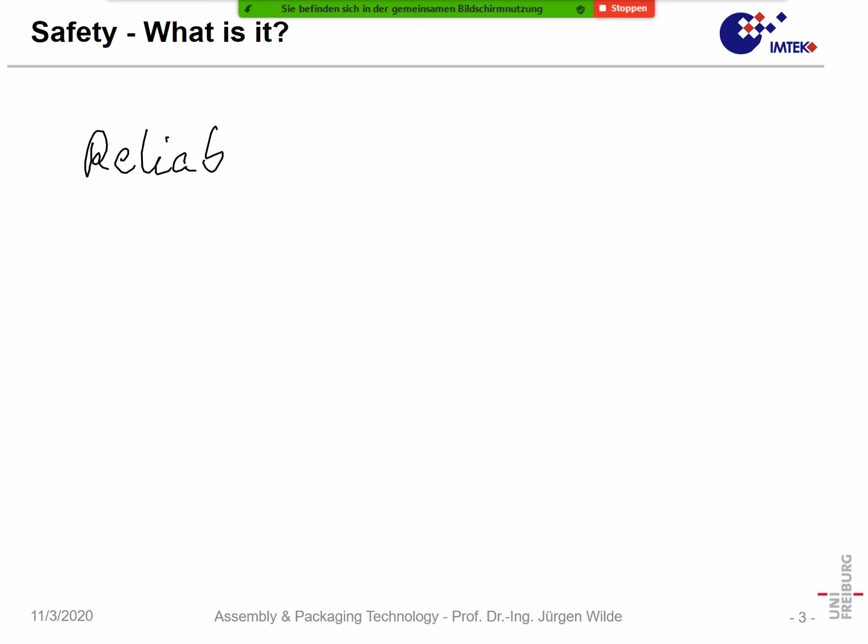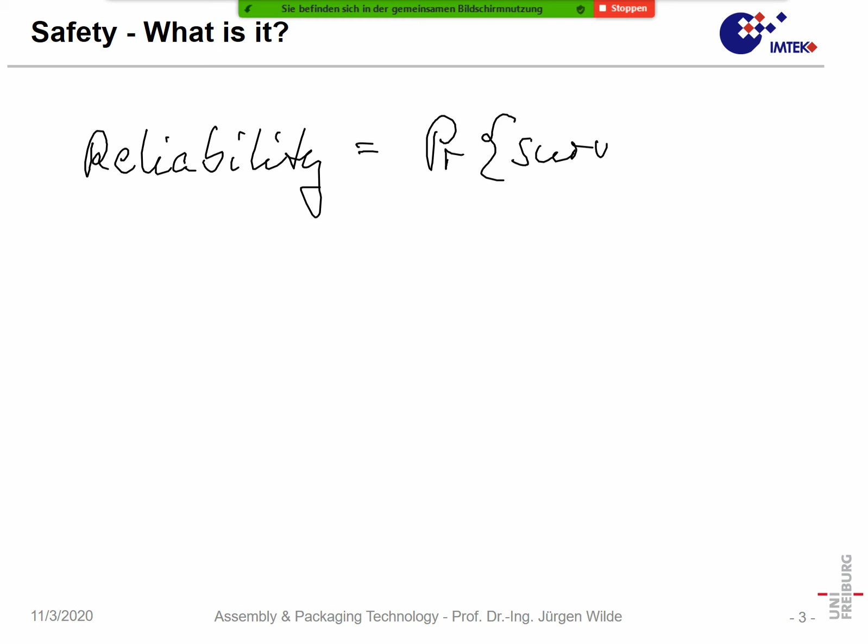So it's a probability of survival, or the probability that it is functional after a certain time. Okay, so reliability, that's you could say the probability of survival, and it goes from 100% to 0%. I don't know why it is not writing here. So it's a probability of survival, 100% to 0%, and it only holds for non-repairable systems.

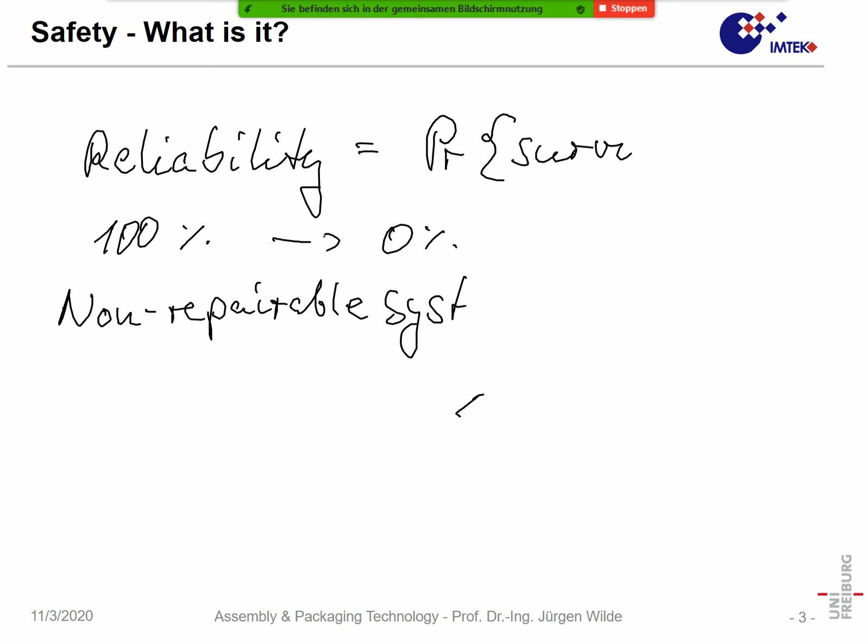So normal technical systems are repairable. For instance, we have a car or an aircraft, or a whole system like the tramway system in Freiburg. All of these are repairable, but non-repairable is, for instance, a single electronic device or a single component. In most cases nowadays, it will not be repaired, and in that way reliability is limited to these.

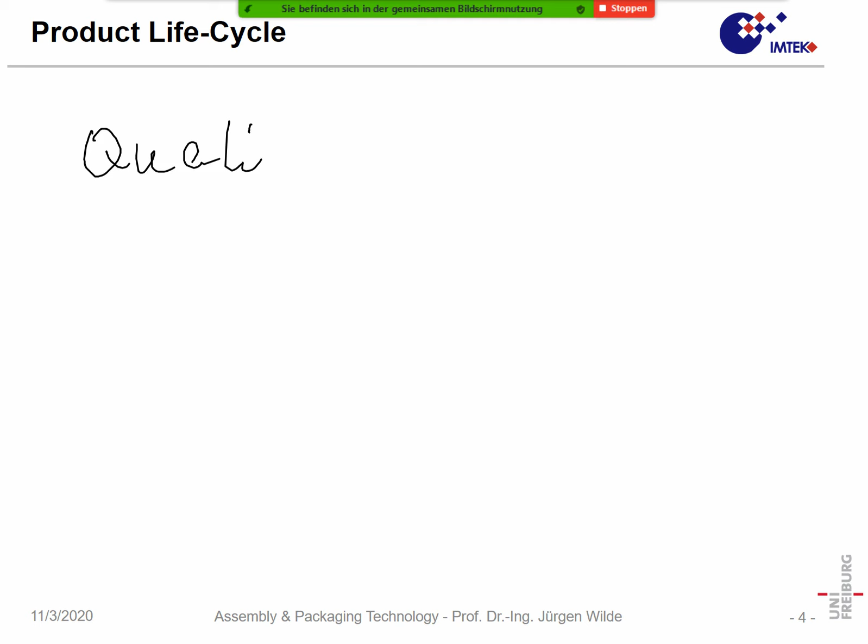Okay. Reliability also is an aspect of quality, we can say that. You could say quality refers to 0 hours, so that means how good is a product? Is it fit for use when you just produce it? And reliability in some way means quality over time.

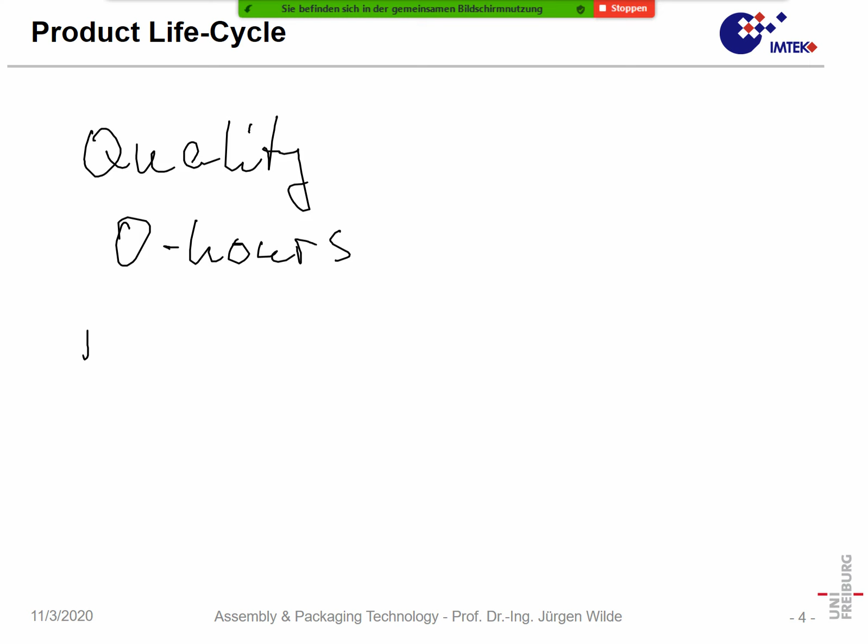Okay, here it limits, and that means the aspect of time is very important in reliability.

So there are typically definitions in standards which have been published, and important standards are the IEC, that's for electrotechnical applications, and ISO is, let's say, for the rest of the world: mechanical engineering, car industry, and so on. So IEC means International Electrotechnical Commission, while on the other hand ISO means International Standards Organization. And the IEC and the ISO are the most top-level standard organizations worldwide. So you could say in some way standards are the more important, the higher their global level is.

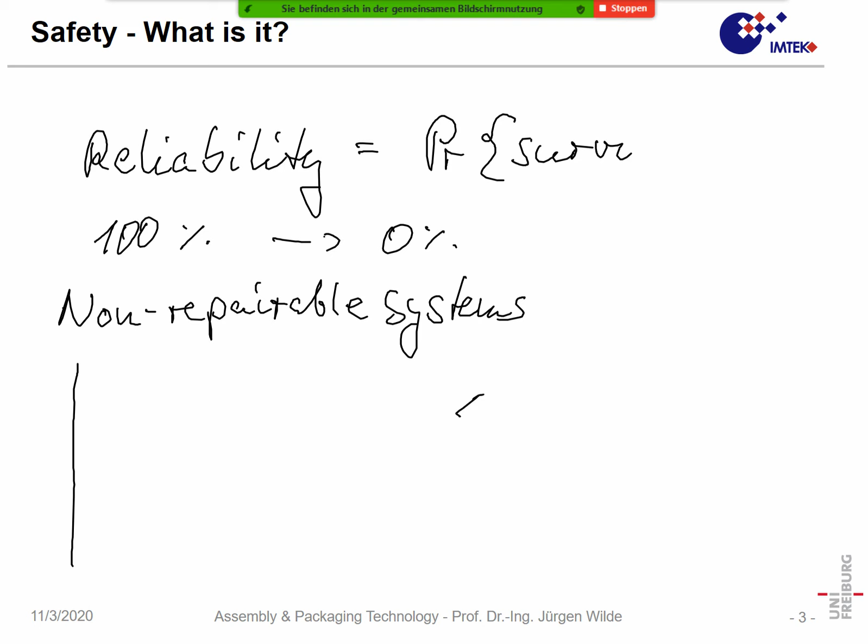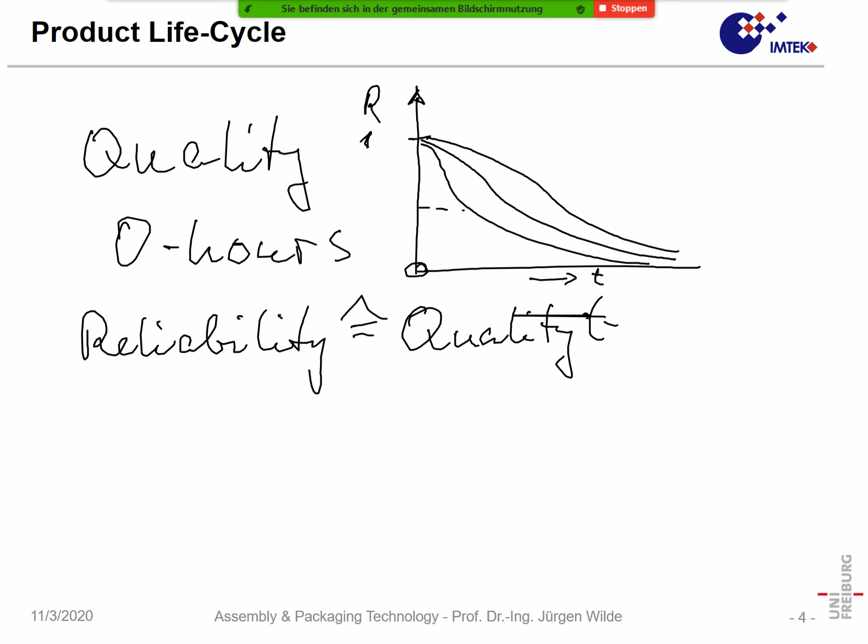Why would there be several curves of reliability over time? Let's say time can be in hours or in 1,000 hours or so. Why could there be a different behavior of reliability over time? So that means you start with 100 and then you get less and less. After some time, you only get 0.5, for instance, or some other time you only have 0.1 or 10%, 50%.

Can you give me an idea why reliability would go down differently? Yes. Can you give me feedback?

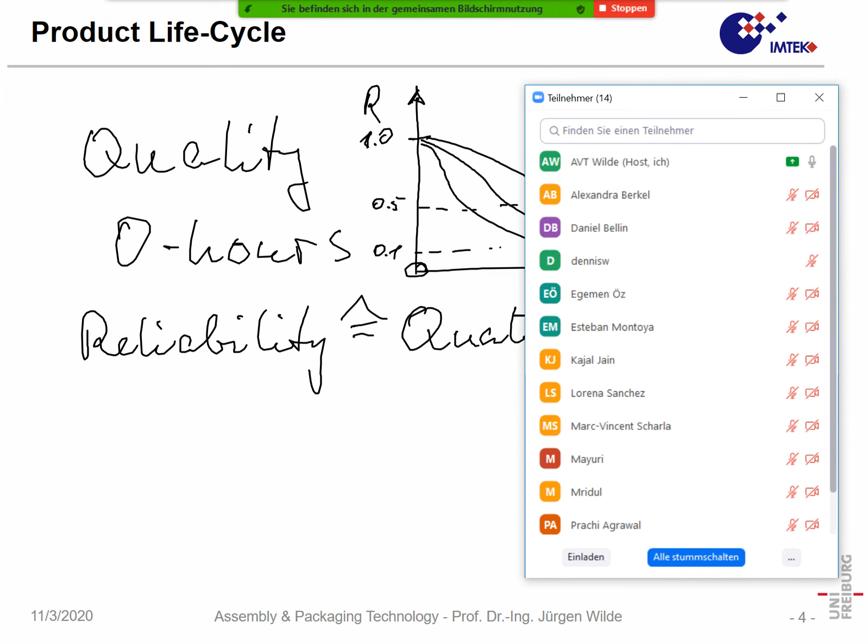Maybe because of different quality levels. Yeah, that is correct. The quality level can be different.

So here we can say reason. I abbreviated quality level.

Now imagine cars. Imagine a car driving in Central Europe, like in Freiburg, under normal conditions, with the driver having a moderate driving style. On the other hand, you have someone in, let's say, some backyard of Asia in the desert, and the driver is driving like hell. What is different here in these two conditions?

So it's the environmental and the loading condition. It can be the load. If you drive faster, if the road is worse, or you don't even have a road but only a track, then there is a much higher load on the suspension of the car, a higher load on the engine, and so on. And of course, a device that is loaded in a more harsh way will degrade earlier.

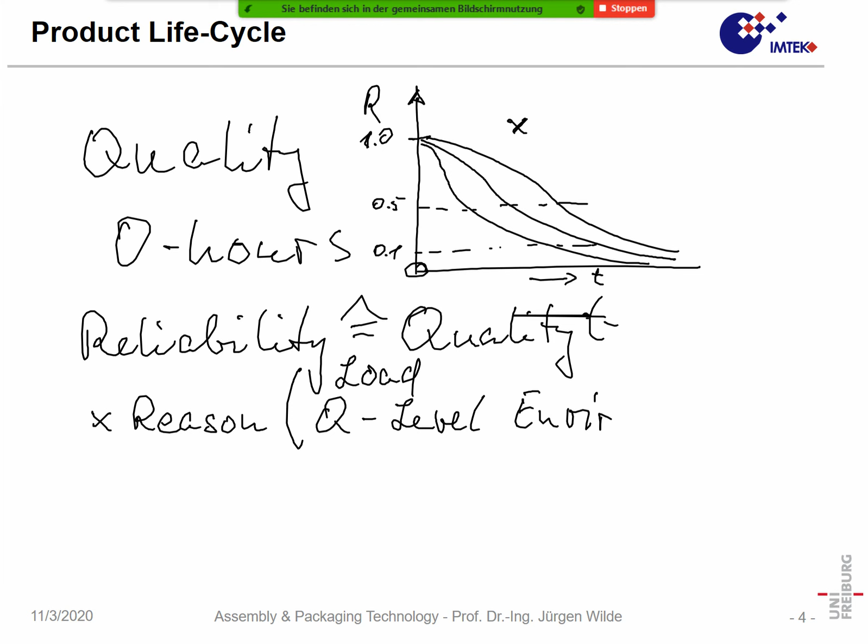So then we have the question of safety, and safety is also important. It's not just the question of whether something failed or not, but safety is a status when the risk of damage is limited to an acceptable value. It is the risk of damage to persons or property — the risk will not exceed a maximum acceptable risk.

Now the question is, what is risk? Risk is something, I would say, on the bad side. What is on the good side is you have a good chance, yeah, of winning, for instance.

A risk is defined by the probability of some event happening — here the probability is used with an H. Unfortunately we have for risk also an R, like for reliability, but that's not the reliability R; it's the probability of an event which leads to a damage, and S is the amount of damage caused by the event.

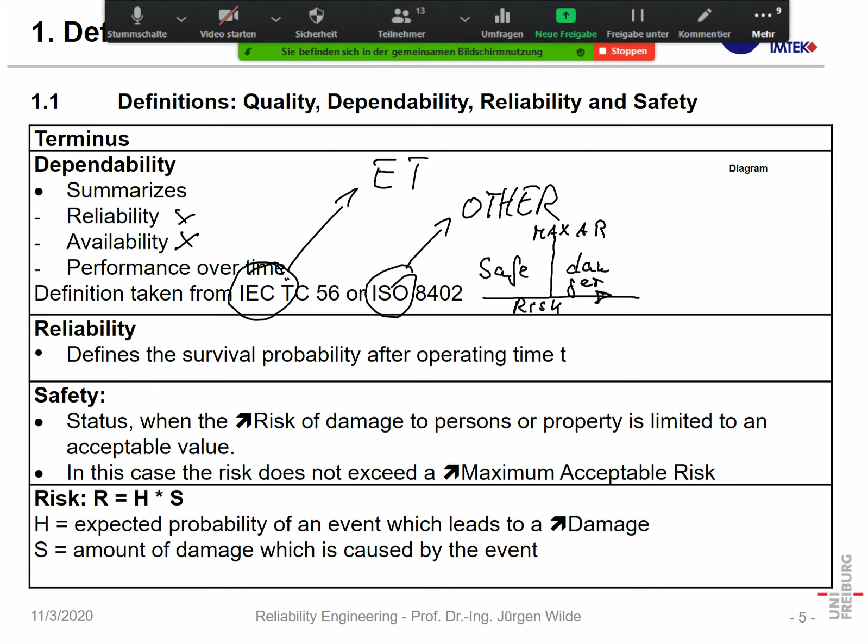Or is there a more intelligent statement about safety or non-safety of nuclear power stations?

We must say it again depends on the maximum acceptable risk. But on the other hand, you cannot just define the maximum acceptable risk in an arbitrary way. You cannot just say that's a number you have to deal with, but such maximum acceptable risk must be defined and found in a proper way.

And there are several aspects. For instance, one is ethics, so that you avoid damage to people or death of people. On the other hand, you could say, what would be a maximum acceptable risk for a new technology?

Then you could say, if I have a similar technology, for instance, a new vehicle type with autonomous driving. And now you would say, when you go for autonomous driving, if the maximum acceptable risk is not higher than the typical risk in normal piloted driving, then you could say that's possibly an acceptable value.

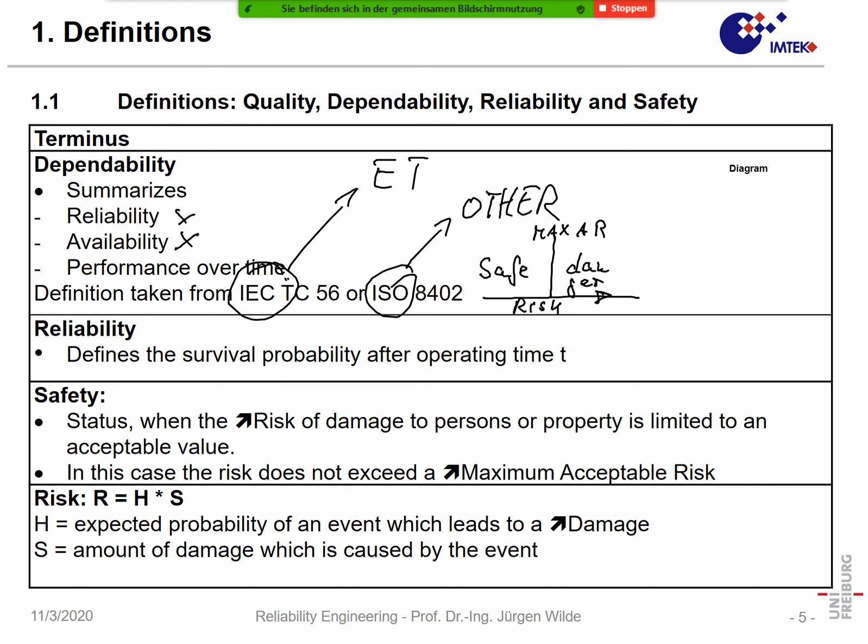Danger: when the risk is higher than the maximum acceptable risk, we are in danger. So then we have other words which are important: we have a fault, a defect, and a non-conformity.

All three are non-fulfillment of at least one of the requirements to a unit. Typically, a fault is used for logic states. For instance, you have some faulty bit in your computer. The calculation fails, but when you reset your computer or restart your program, all is fine. You have no permanent damage.

In case you have a permanent damage, in most cases to hardware or to material goods, it's a defect. And the failure is the transition from a non-defective to a defective state. When you go from a defective to a non-defective state, it is a so-called repair.

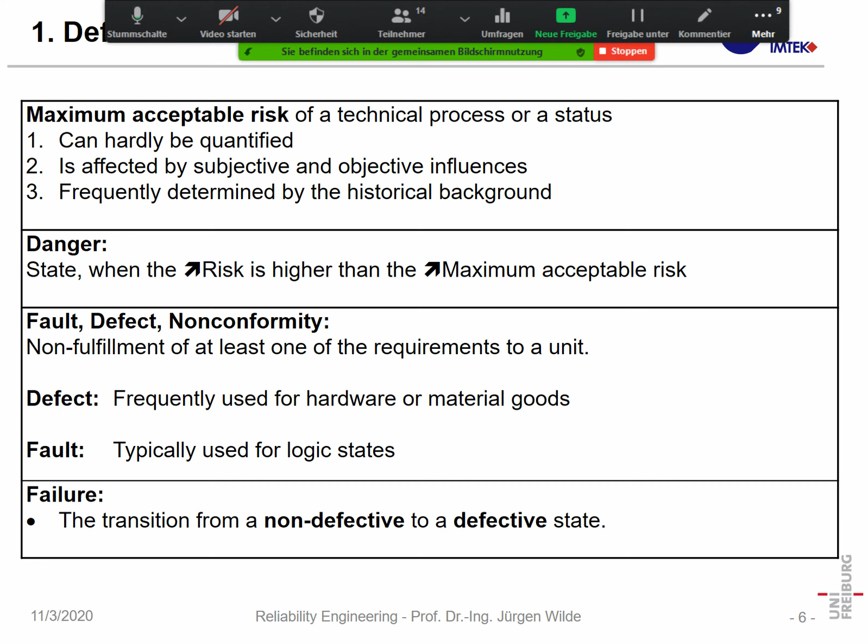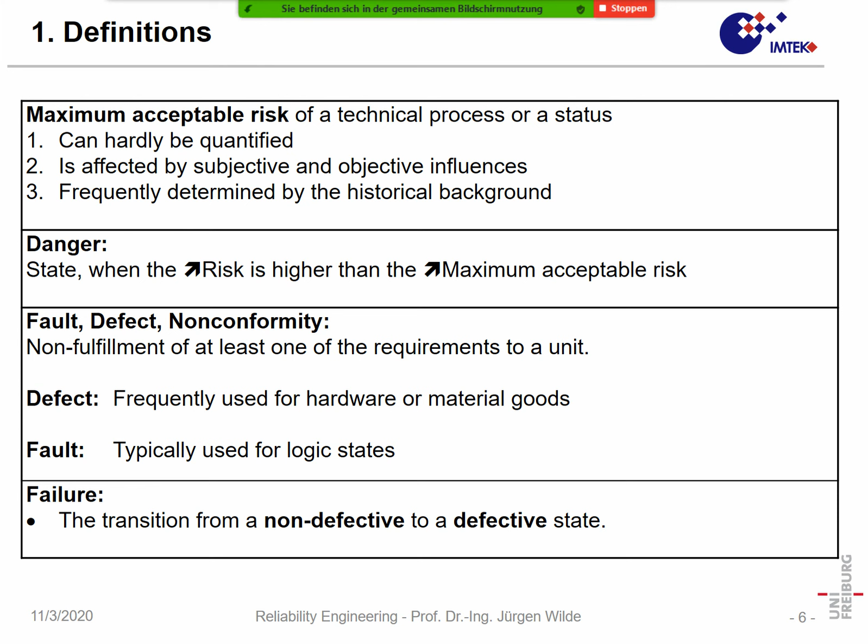So non-conformity is the general non-fulfillment of requirements. Defect is mostly used for hardware, and defect is mostly non-repairable and permanent, while fault is more a logic state or a state of operation that is not okay, but which can be reset, for instance, by software operations or switching operations or something like that.

Okay, so we had some definitions, and now let's again repeat with the diagram. Unfortunately, that system doesn't work as I would like it to. Let's say here we have, now we make 100%, we can also make 1, and reliability goes down over time. That is R.

On the other hand, we have the probability of failure, and that probability of failure is the so-called failure function. Both are complementary values, and you could say F is 1 minus R. So the failure probability is 1 minus the reliability probability, and that is a very important and basic function.

Okay. Do you have an idea? What is the probability of the mean time to failure?

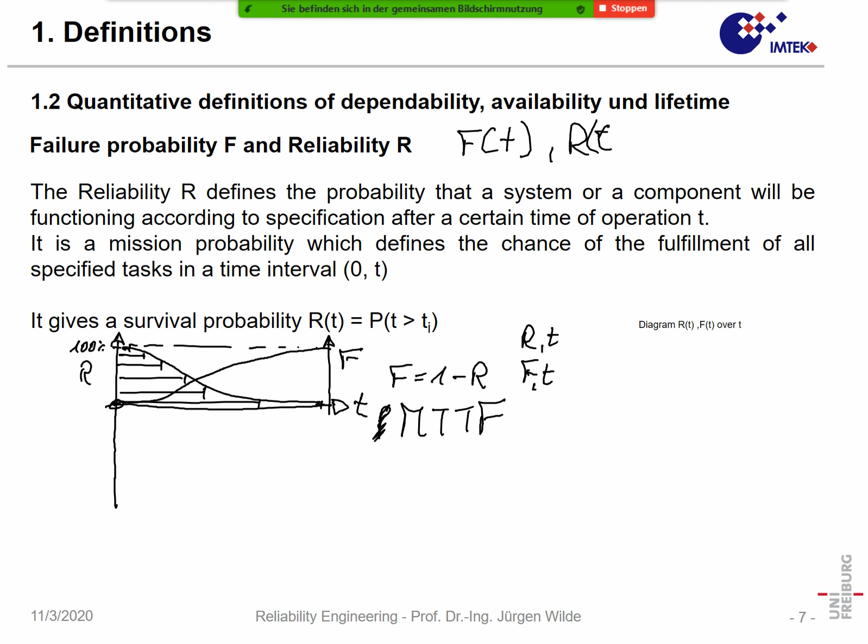That depends on the distribution function. And the distribution function can be, for instance, Gauss distribution. In that case, the probability of failure would be 50%. But in many cases, it is just 63% when the so-called Weibull distribution holds.

Okay, let's go ahead.

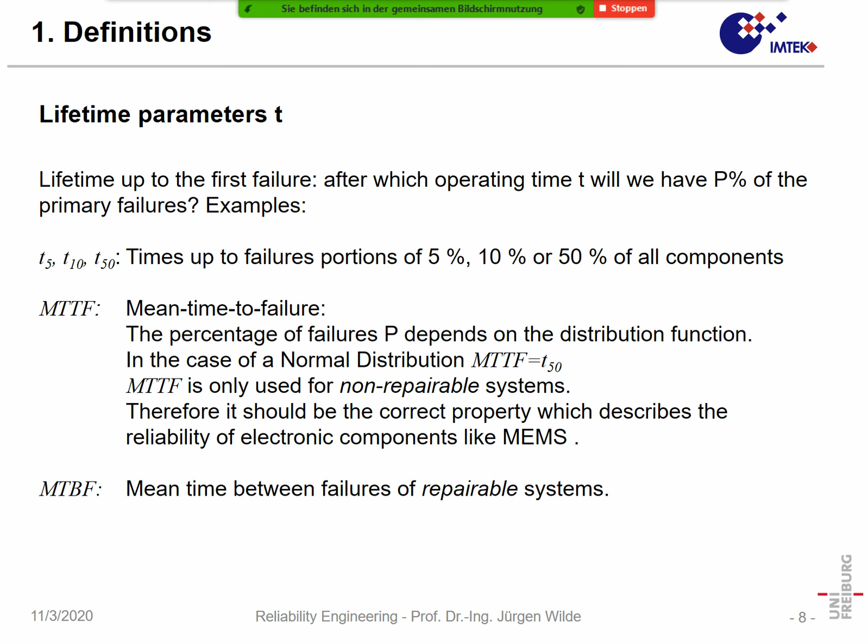So we have lifetime parameters. We could say we have times when 5% failed, T10, 10% failed, or 50% fails. And the mean time to failure is the average of all lifetimes we have in a system. In the case of a normal distribution, the MTTF is just T50. Again, MTTF is used for non-repairable systems.

When we look at, for instance, MEMS or other electronic devices, MTTF should be the proper term we use here. In case we have a repairable system, we use the so-called MTBF, the mean time between failures of repairable systems. But we will see that later on.

Now another aspect we already touched on is availability. What is availability? It's an important factor, for instance, when you buy a more complex system. Imagine you buy a truck, or an aircraft, or a tramway. Reliability could be one aspect, but you are not just interested in when the first failure will be, but more interested in, when you operate such a system over, say, 10 years, how many hours could you use that system.

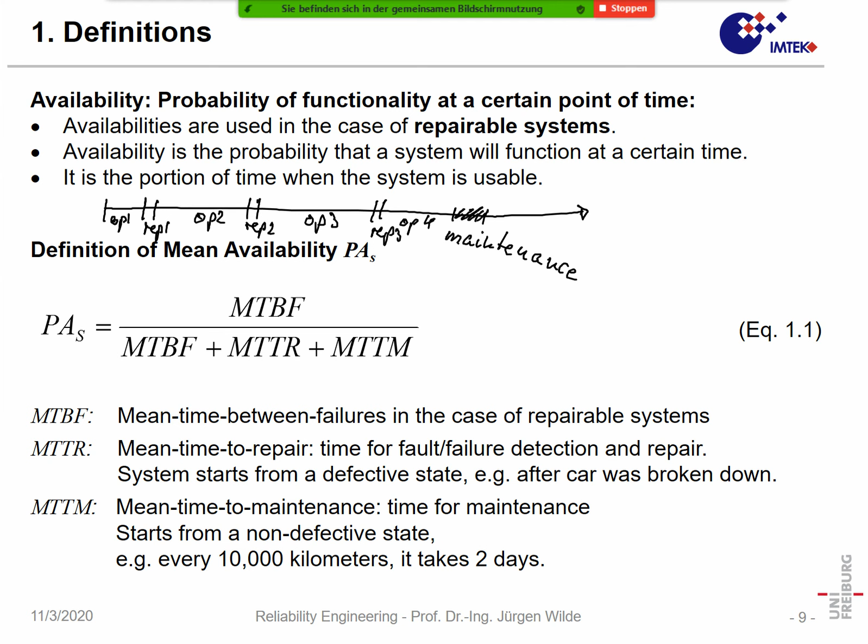Nowadays, when operators of complex systems, especially traffic systems, operate these, they make a contract with the supplier, and the supplier has to guarantee a certain availability. Of course that's not so easy, because availability again depends on the quality of maintenance and repair which the user has. But in the end, the user wants availability which is as high as possible.

Okay, now how can we define reliability? We have already seen it, and it should always be taken on a statistical basis. Reliability, as I said, it makes no sense to use it for a single device. It always makes sense for a certain set of devices. And that set is defined by the number of devices which come into...

Sorry, I have to get my stick back.

So n is the number of devices which come into life, or which are produced, or which are part of the set tested. After some time, n have failed, and so the reliability is 1 minus n divided by n. The failure function or failure probability is just 1 minus r of t, or you could also say f of t is n divided by n. So, easy example: 1 out of 100 has failed, so we have a failure probability of 1%.

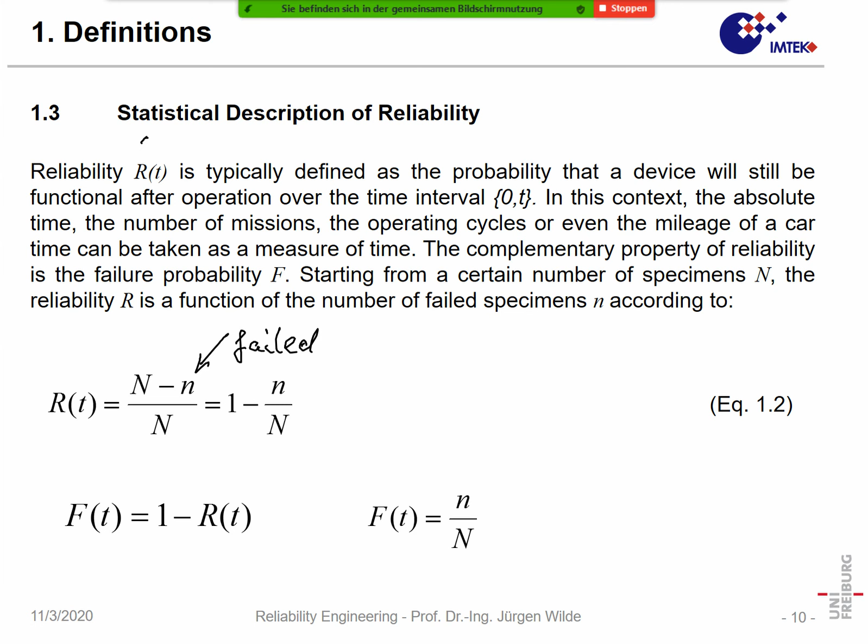As I mentioned, we have the so-called mean time to failure. And the mean time to failure is again defined on the basis of the failure function. We could say the mean time to failure is when, that's r of t and that's t, you take the area under the curve, reliability over time, and you divide it by the height here of that curve. Then you just get the average reliability, the time for the average reliability, and that's mean time to failure.

So in fact, if you write it precisely, it's just r of t dt integrated from 0 to infinity, that's the area under the curve, divided by the height. As reliability can only go from 0 to 1, that delta r is just 1. So in that way we have a very clear definition of mean time to failure, and we also see that mean time to failure mainly depends on how this curve goes.

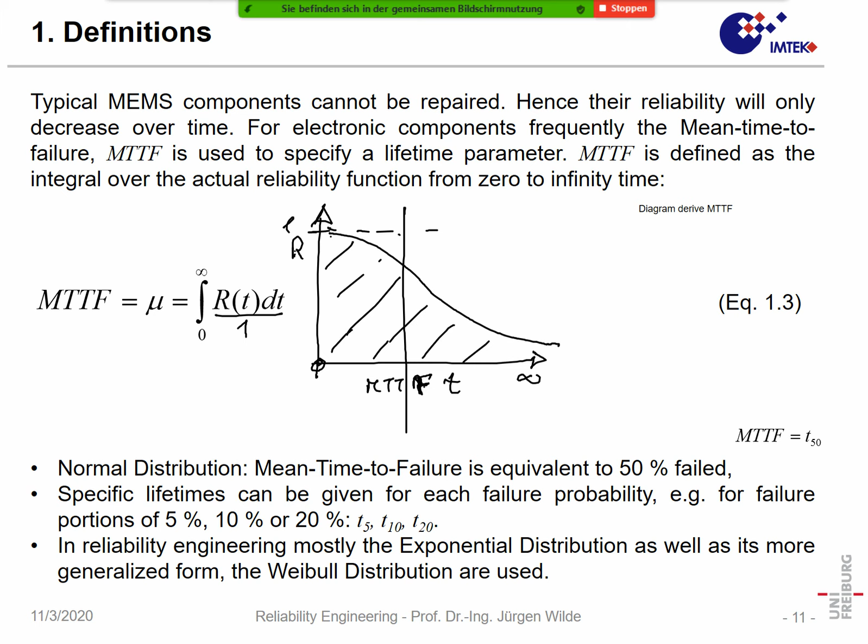Now, in that case, it's important to look at distribution functions. Here I made an arbitrary sketch of reliability going down - that would be a typical assumption for a relatively long time. Reliability only decreases slightly, then decreases more strongly, and for the last ones, it takes very much time to fail. That's typical behavior of such a curve, and now we can look how such curves will look.

Of course, when we just take a normal distribution or a Gauss distribution, we take here f of t - that's the so-called density function. The probability in the Gauss distribution is going in that way, and here again we would have the mean time to failure, for instance.

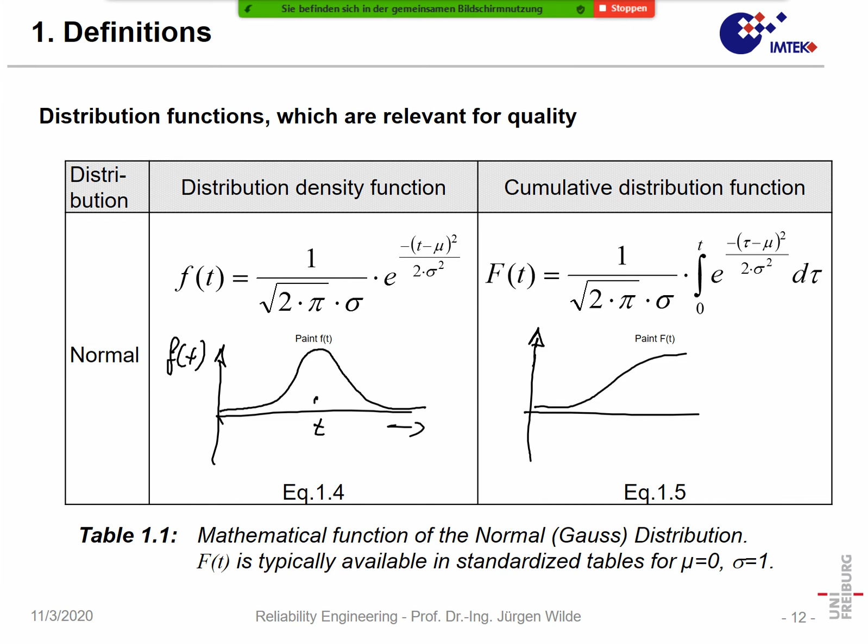So we have the density function and we have the cumulative distribution function, that's a basic thing in statistics. Typically, the distribution density function is the first derivative of the failure function derived by time. The failure function itself comes when you have the density function and integrate it from 0 to t, then you get the failure function f of t.

There are several functions which can be used, and the most simple is the so-called exponential function. Again, we take the integral or cumulative form: F of t is 1 minus e to the power of minus lambda t. Lambda here is a constant parameter, the so-called failure rate. When we take the inverse of lambda, we get something like the mean time to failure value.

Another function very similar to the exponential function is the one made by Mr. Weibull. It looks very similar: 1 minus e to the power of t divided by tau, which is a characteristic lifetime, or you could say a time constant, to the power of beta. As we see, when beta is 1, we just have the exponential function as a special case of the Weibull function.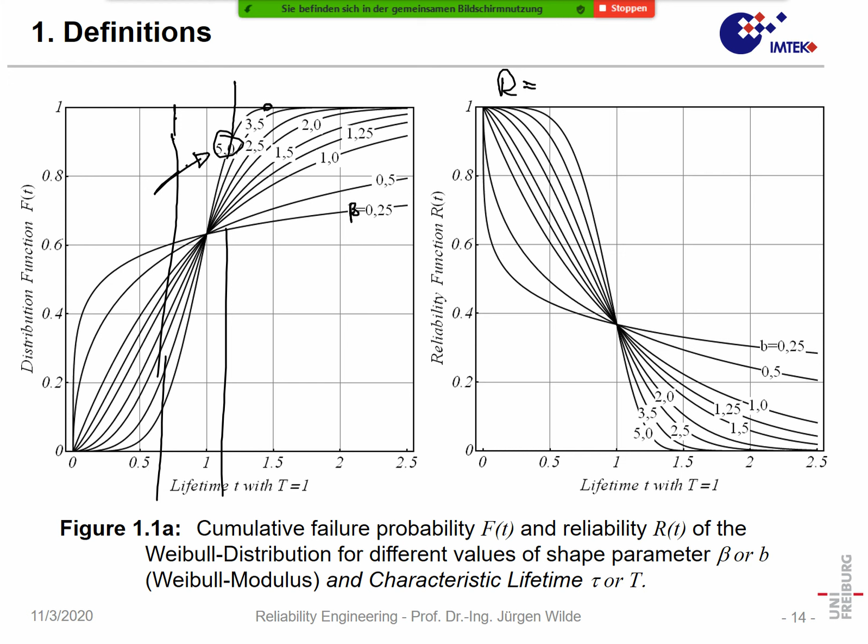Here, the reliability is very simple, so I do not have to discuss it. R is 1 minus F, so it's just the complementary function.

When we take the density function, we can see, for instance, for a certain beta value, we have in the density function a bell shape. Again, please note this is the Weibull function, not the Gauss distribution. But in cases where the beta in a Weibull function is between 2 and 5, you could typically say it is very hard to distinguish - is it a Weibull, is it a Gauss?

But in reliability engineering, it is convenient to use the Weibull distribution. In mechanical engineering, for instance, where just the strength is distributed, mechanical engineers typically use the Gauss distribution, while people more oriented in a chemical way, for instance in the ceramics industry, prefer the Weibull distribution.

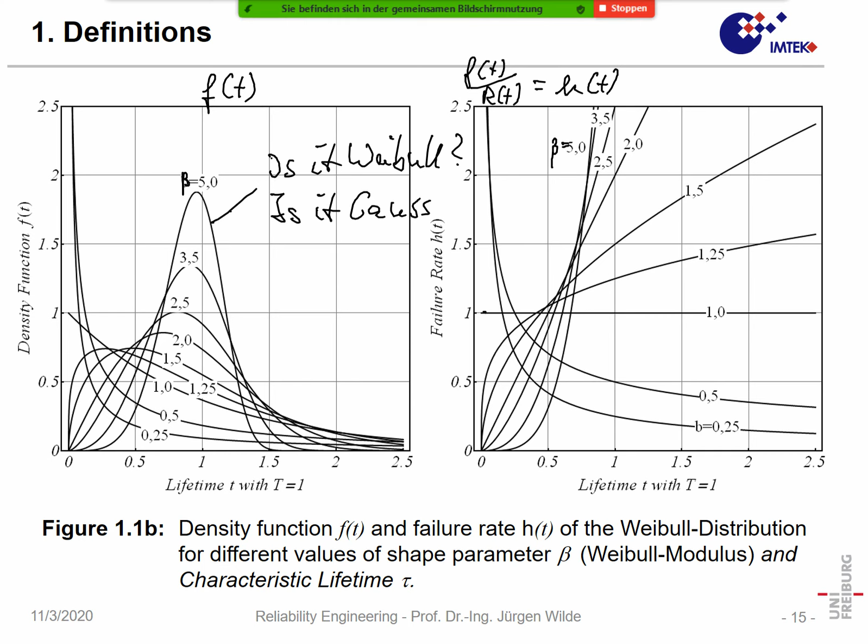In that way, we can see that it is very important which distribution function we have to assume in our system. Again, what we are seeing today will be an important tool for understanding more complex behavior.

Okay, give me a second. I would like to start...

Okay, let's go to the next part. My question is, can you still see my screen? Number 2, dependability of mechanical systems. Yes. Okay, thank you for the feedback.

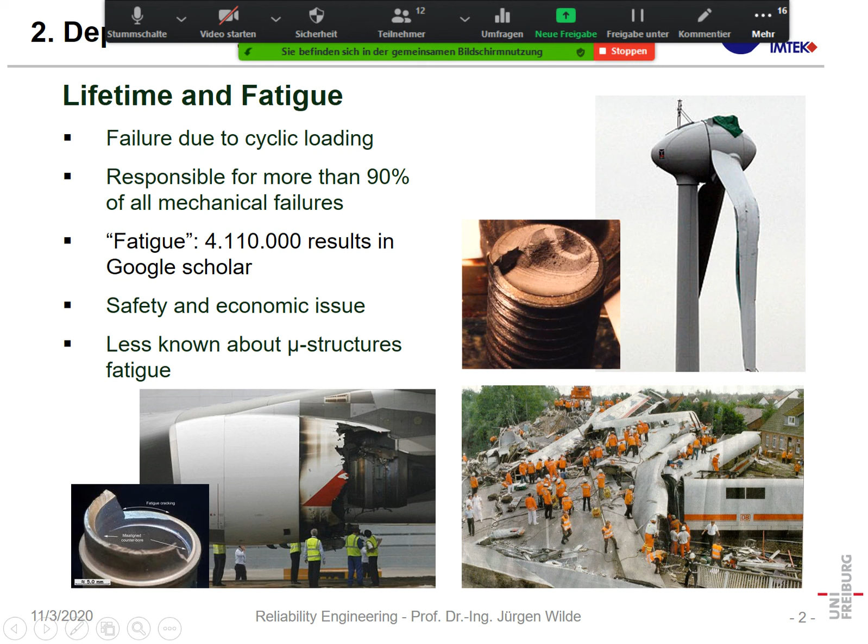Just to give you some examples where single components failed: here on top we have typical fatigue failures. For instance, in that lower left case, a turbine blew up in an aircraft. That can be very dangerous because when the turbine blades break and fly away, they can fly through crucial parts of the aircraft. For instance, they might sever the control which gives control over aileron and so on. And in that way, just by a crash of such an engine, the complete aircraft could be lost.

Here we see a typical example of such a fatigue failure. A crack started and it developed in the part until at some time the crack was so large that the part was weakened very much. And when this part was weakened too strongly, it just broke. So that's a typical event: we have a fatigue failure which grows gradually. We have a small crack, maybe only growing with a rate of, let's say, 10 to 100 nanometers per load cycle. But if there are millions of load cycles, it will sum up to millimeters or centimeters, and finally the part is breaking. Here it is a windmill.

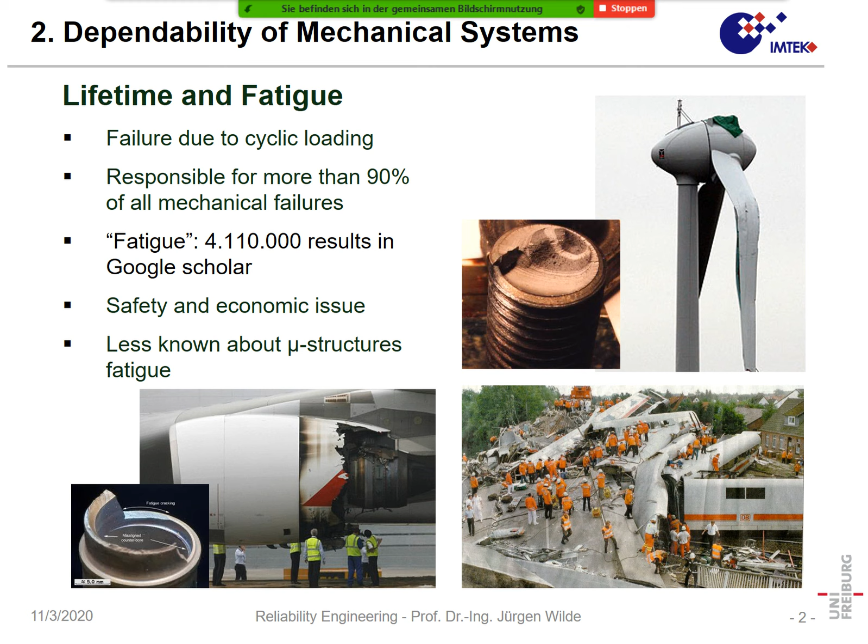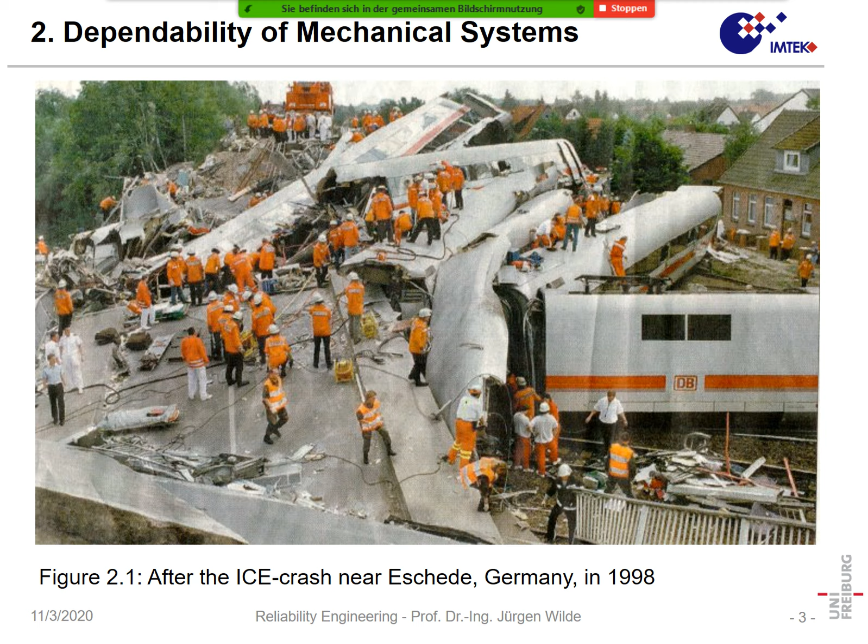That's an image I took from the internet. You can see here a bridge. The train raced into that bridge, and the bridge was destroyed. The garden of that house was destroyed, and at least 5 of the cars of that train were completely lost, including the people who were in that train. So it happened in 1998. The train had a speed of 200 kilometers per hour. It's not so much when you think about the speed of modern high-speed trains, but what happened?

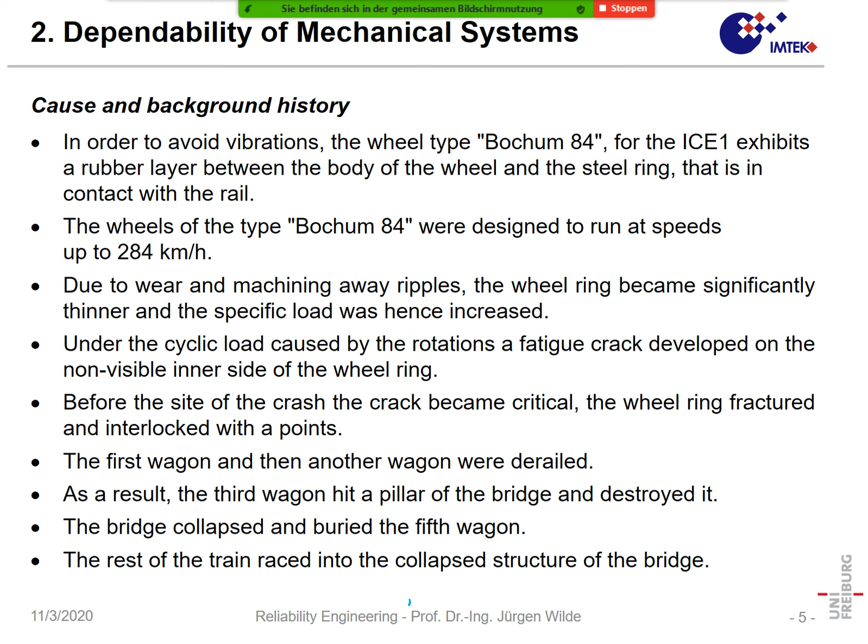It was a broken wheel. That broken wheel was a fatigue failure. And what happened is we have the wheel, and the wheel has a ring. That ring is made of a special steel, and in between the ring and the very wheel, there is a rubber. The rubber is only for comfort reasons, so it is damping the vibration, because at a high speed you have a vibration which is transferred from the rail to the wheel, and if there is rubber in between, like in your bicycle tire, then it is just damping.

Unfortunately, these rings get ripples, and in order to remove these ripples, they must be turned down. And the reason for what happened and what led to the crash was the following: here we had cracks which developed due to fatigue, and that weakened that ring. And on the other hand, by turning down the wheel over time, the ring became thinner and thinner, and at some point the ring was too thin and the fatigue crack was too long, and so this ring just broke.

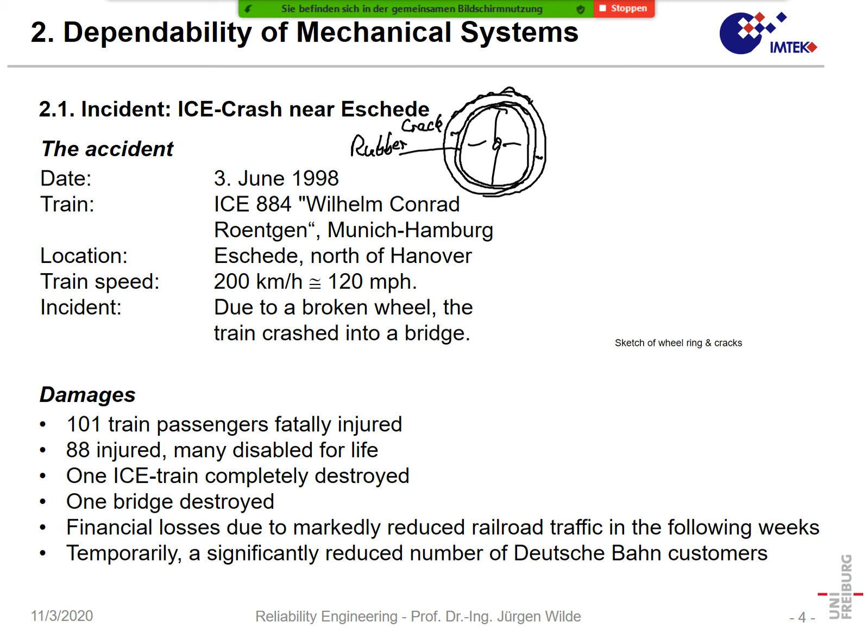Fatigue is mainly a result of the loading conditions. If we have a mechanical part, we can load it in different ways. Imagine a string hanging from the ceiling, and you put a weight on that string. Depending on the weight, you have just a constant load. Some materials just tolerate it, so you can hang something on that string until infinity, or almost infinity. It will just tolerate it if the load is small enough.

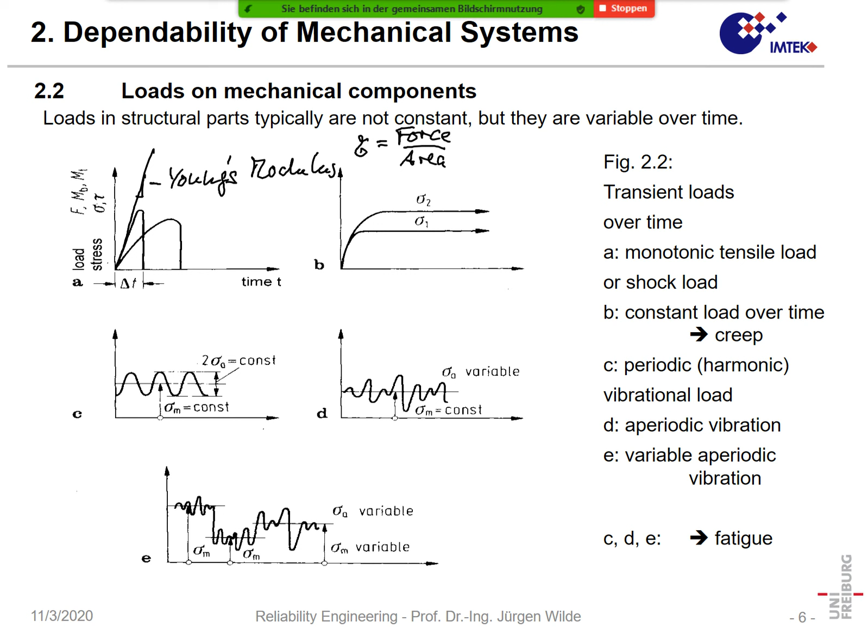So the question, that could also be a question in an exam: will the loading type have an influence on lifetime and reliability? There are constant loads or constant stresses, monotonic stresses, cyclic stresses, or variable stresses. The question also is, what is the load on a component? Is it always the stress we have, like it is used in engineering, or what else could it mean? And also, generally, what is fatigue? And for instance, what is the SN curve?

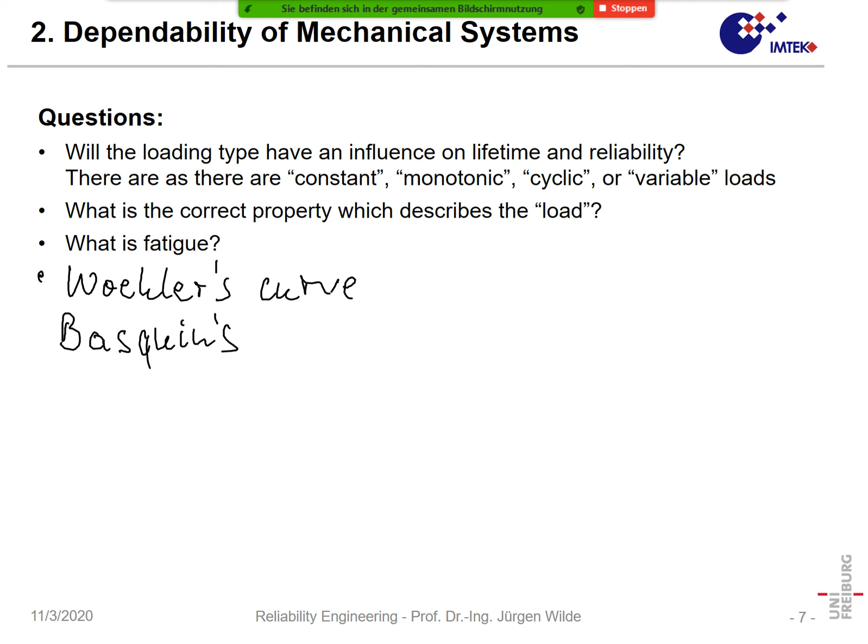For the Americans, it's Basquin's SN curve of fatigue.

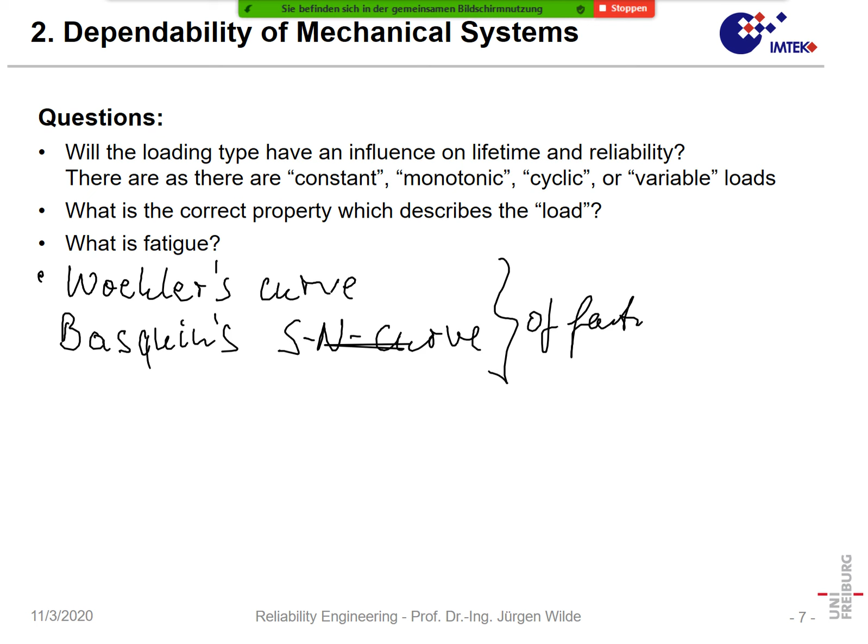There is a second effect which is also a risk factor. We have seen that alternating loads will lead to the fact that a stress that is tolerated is significantly lower than the stress just in a monotonic test. On the other hand, people made the following experiment.

You have a shaft, and that shaft is pulled. When the shaft has a uniform thickness, it has a constant stress over the cross-section. Now imagine you embed that shaft in a shaft which is thicker, but which has a notch. It was found out that when you look at the residual cross-section in between the notches, the stress is different - at the tip of the notch, you will have an increase of stress.

That is very important, and also that was one factor which led to the improvement of mechanical shafts in the 19th century. People found out they should not produce a notch or an edge in locations where you have maximum stress. If you need a notch for some reason, you should put it in a region where the stress is lowest, because a notch will always increase the stress at the tip of that notch.

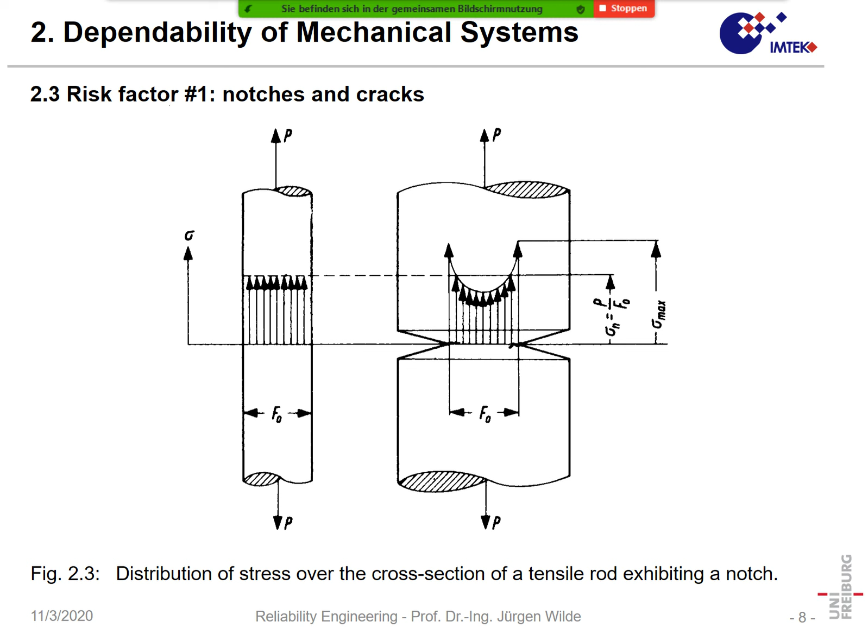And the ultimate sharp notch is when you have a crack. Imagine we would have a crack here. A crack is extremely sharp. The tip of a crack only has a roundness, or radius, of let's say nanometers, and that means the stress concentration is very high.

When we have the material here, and we pull here, and we look at the stress at the tip of that notch, of that crack, we can see that the stress is maximum here. We can have different loading - for instance, tensile loading. So we have this increase of stress. On the other hand, when we have so-called shear loading...

...above and below the crack or notch, it is shifted in different directions. We have two maxima under different angles. But what we can also see is that the stress increase is very high - it can be more than 200% compared to the average stress here.

So now we can say what is the functional behavior, and when we look at the stress components, we can say the stress increases with some factor divided by the square root of 2 pi r, where r is just the distance we have here. So the closer we get to the crack tip, the higher the stress is. In a very brittle material it increases with one over the square root of r, and that means we have a stress concentration or stress singularity.

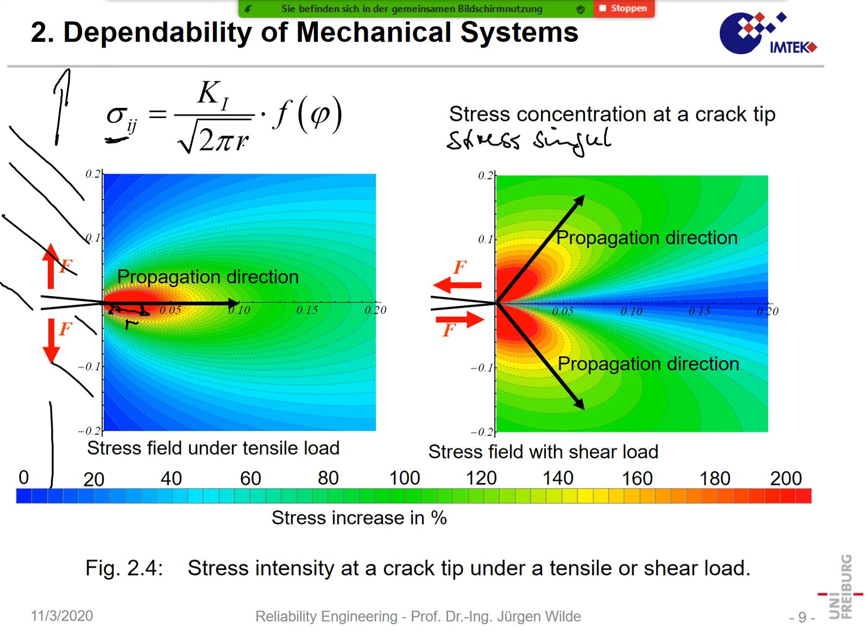In this case, this distribution was made with the finite element method, but you can sometimes also do it with an analytical method - the so-called Sneddon equations. You do not have to know these, but it is important to see that the local stress depends on the average stress times the square root of the crack length.

And the crack stress increases with the closeness to the crack tip. So that formula also shows us that a part which has a larger crack or a deeper notch is endangered more than a part that only has a small notch or a small crack. So the radius is important - in a crack, the radius is almost zero, and then the crack length is the important part.

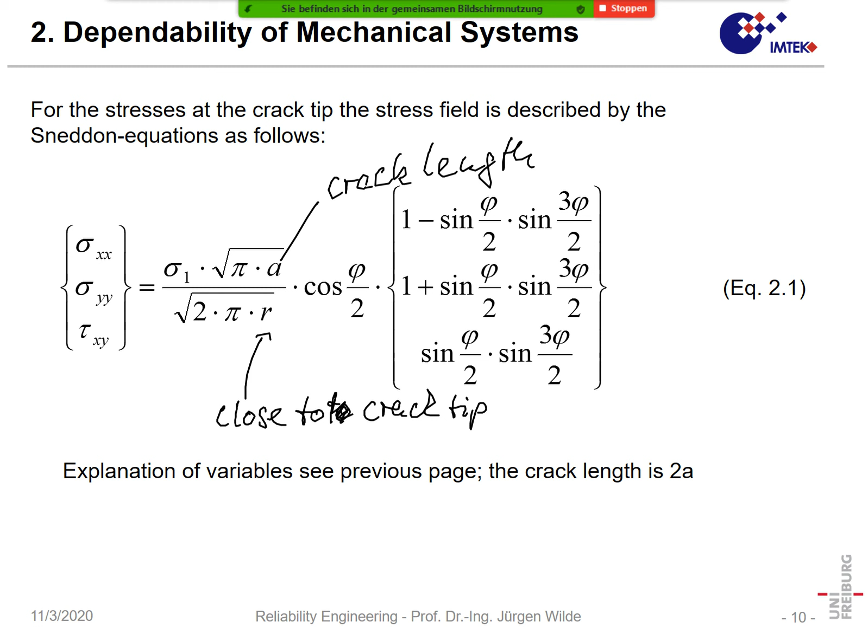A factor defining how severe a crack is, is the stress intensity factor - it's the tensile stress multiplied with the square root of the crack length. This means the stress intensity is a factor which defines a load in a material that has a crack.

The factor Q is something between 0.7 and 2.5, so there is a certain prefactor. Maybe pi divided by Q is about 1.5 or something like this, and when you take the square root of 1.5, it's something like 1.2. So that prefactor is not so important.